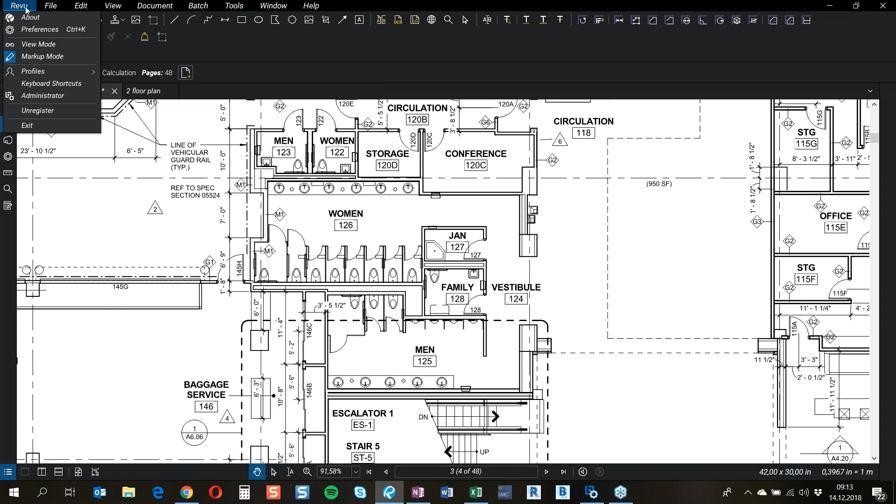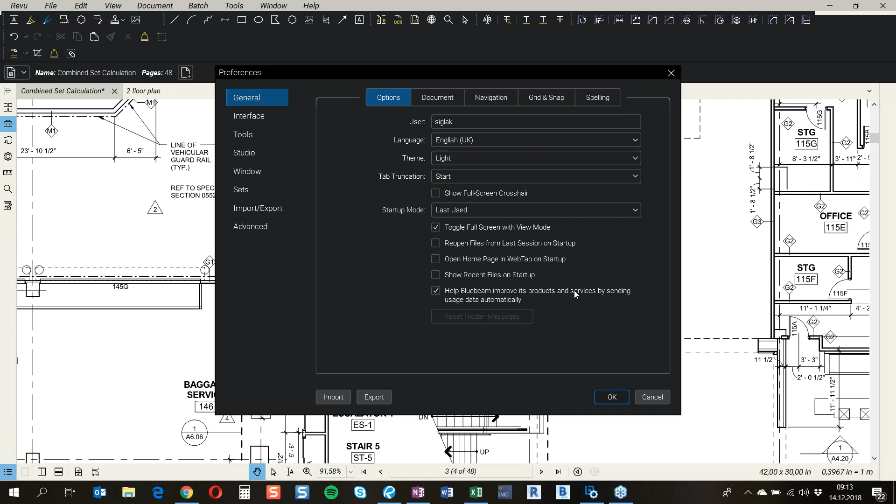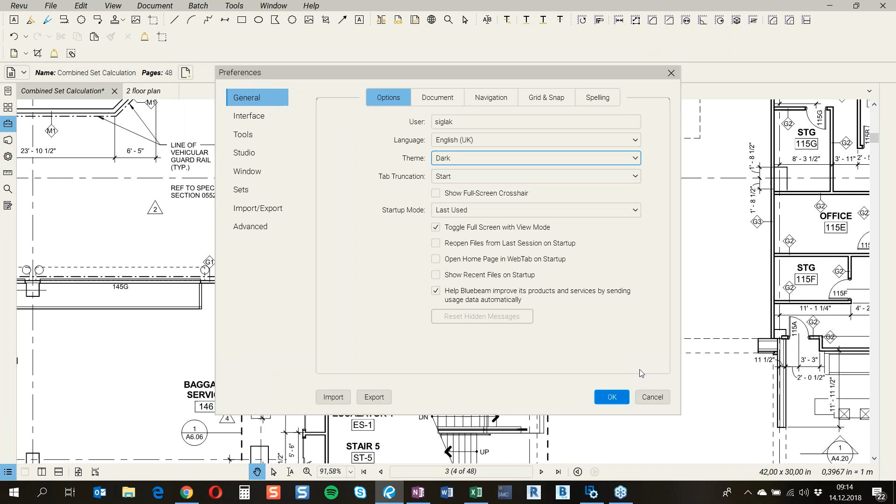So the first thing I'm going to show you is if you go into Revu and Preferences, you have a lot of options here. You can adjust this program as you want to. As you can see, the theme is dark. So if some of you are used to Adobe, which is more of a light program, you can actually change your interface to be white. If you're more used to Adobe and you switch to Bluebeam and think, oh, this is too different, I don't want to use this program, maybe try changing it into a light interface and see if you think it's better. If you go into your preferences, you can find a lot of things you can do here. I'm just going to change it back to dark because I'm used to Bluebeam's dark interface. So it's nice to know.

Second one is you can actually export your PDF from Bluebeam to another program. So if you go to File, you can export your PDF to several different file formats. If you have a PDF with a lot of text and you want to edit it further in Word, for example, you can export it directly into Word. You don't have to copy the text and then paste it into Word. You can take either the entire document or just a page region, so you can take a snapshot of the specific page you want to have in Word.

I'm sorry, I'm just going to sip a little tea while I'm talking. You can also email your PDF, so you can either just send a normal email, or, as I'm going to show you later on, you can use templates. Bluebeam has a lot of templates that you can adjust, so you don't have to do the same operation again and again—you can just take it from a template. So it's nice to know that you can export your document into Word if you want to edit it more.

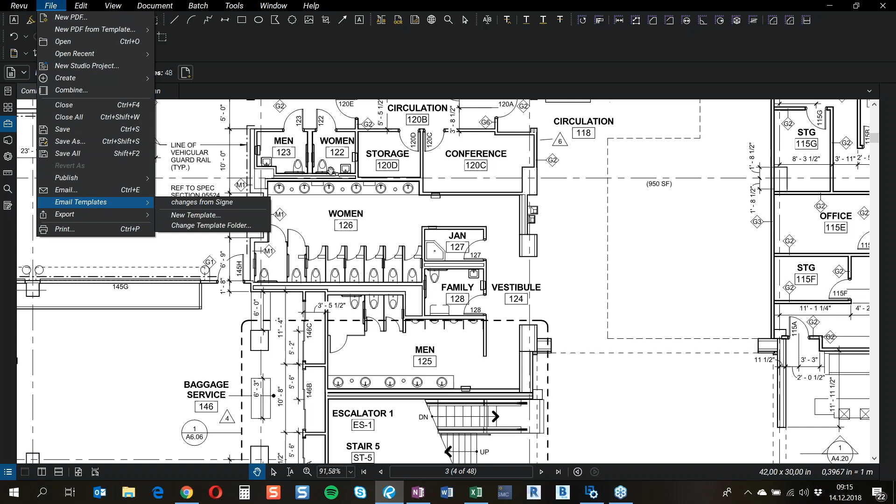Now I'm going to show you how you can easily create a new PDF. Let's say I have this drawing and I want to suggest to the architect that we have one more sink here. I know there's not room for one, but let's just pretend it is.

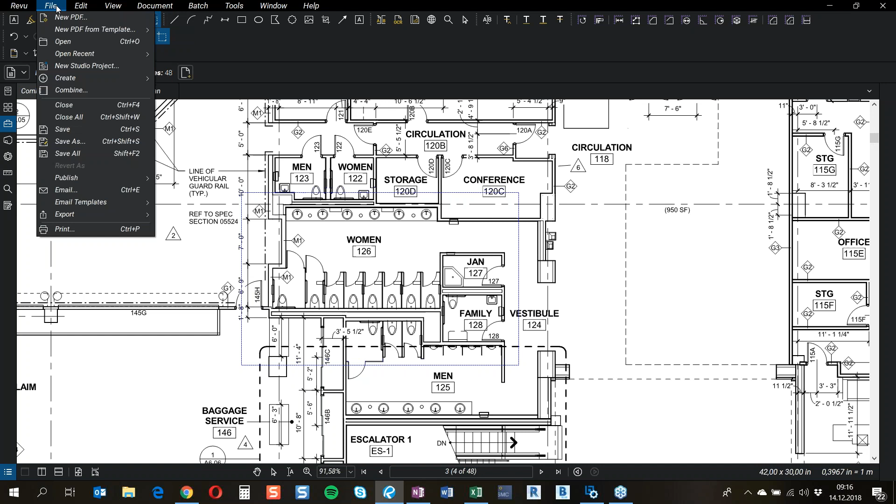So what I'm going to do is just take a snapshot of this area like this. And then I'm going to go into new PDF from template, and then I have my request for information form.

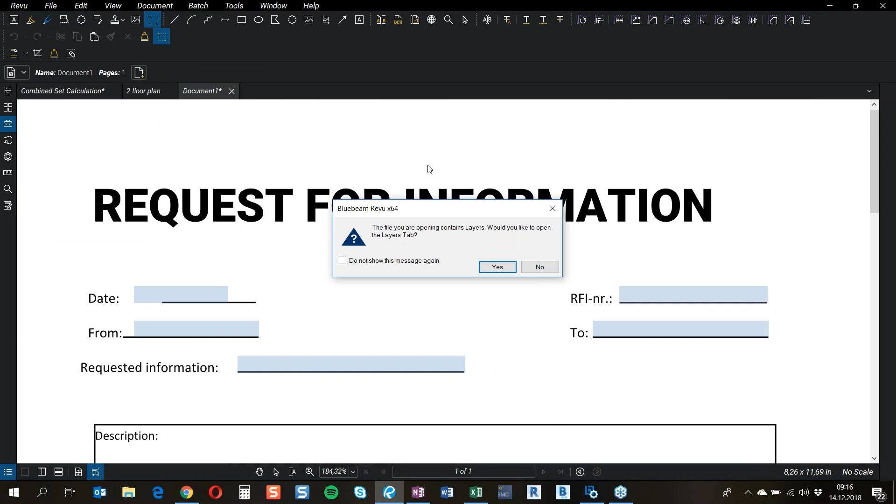This is a template that I have made where I can paste my drawing. So I'm just going to paste it here, and do it a little smaller like this.

Here I've added some text fields, so I can add the date today, and I can add the RFI number. This is number 1, and this is from Signe, and I'm going to send it to Tomas. And can we add another sink?

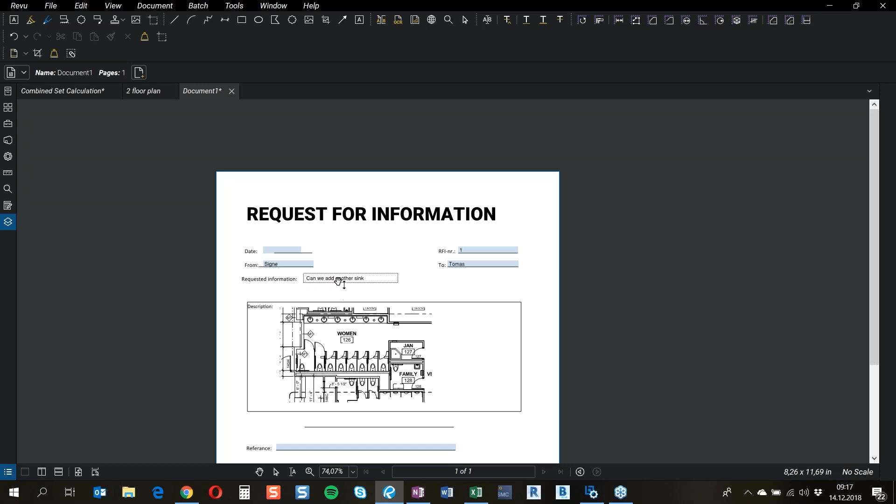So it's really easy to add text into these fields. Now I can take one of these sinks and just take a snapshot and paste it in here. I can also turn it around, so maybe turn it 90 degrees like this.

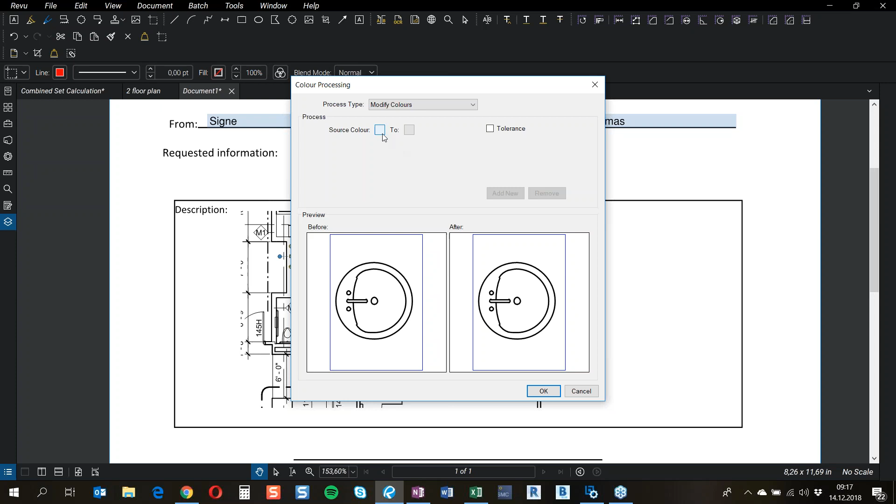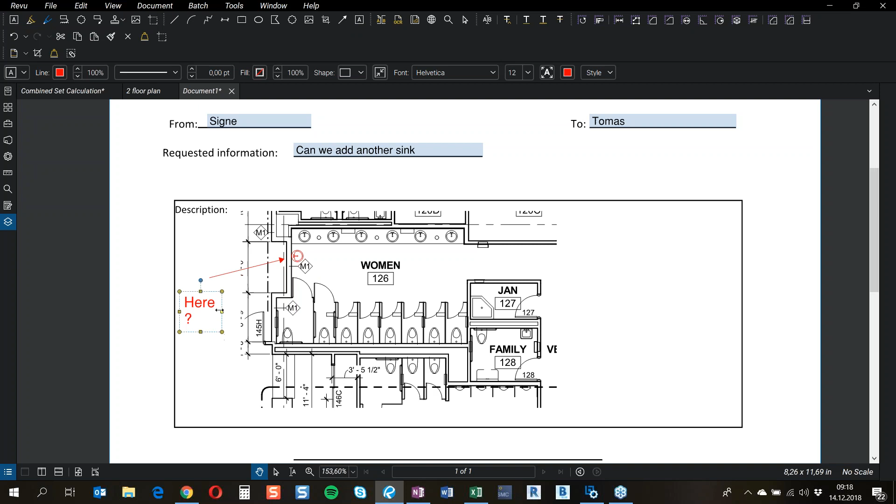I can also change the colors. So you see, I can change the color to red so that I don't change the design of the drawing, but really specify that this is a change that I have made. And I can maybe add an arrow just to notify some more, and maybe a text box saying 'Here?' like this. So you can see it's really easy to create a new PDF, explaining the information that you want and so on.

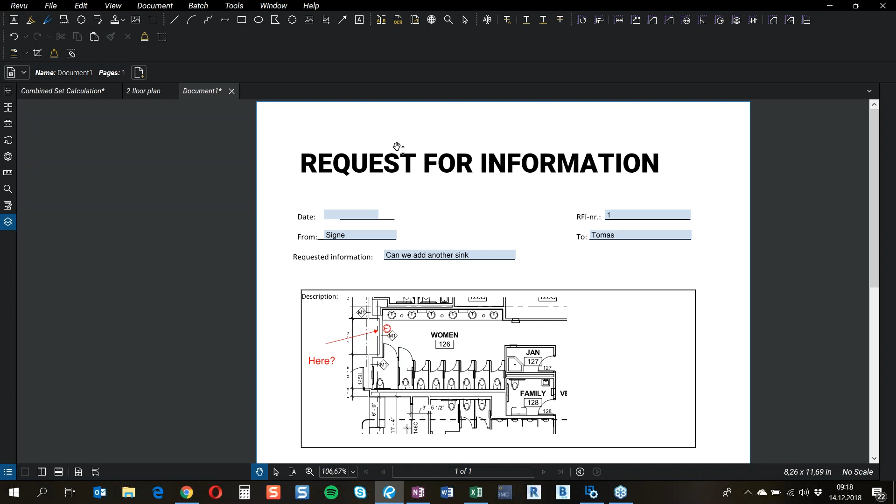And you can also have a digital signature. You can easily add and reply and so on. And as I said, if I want to send this as an email, I don't have to save the PDF on my desktop, open my email, create an email, and then add it as an attachment.

I can just go to File, then Email, and go to the email template, and then Changes, and then my email will open up. As you can see, in my template I've added this text, so I don't have to write it every time. Then usually I send it to Tomas, and then it's just to press send. So it's easy to create a new PDF and then send it by email or exporting it.

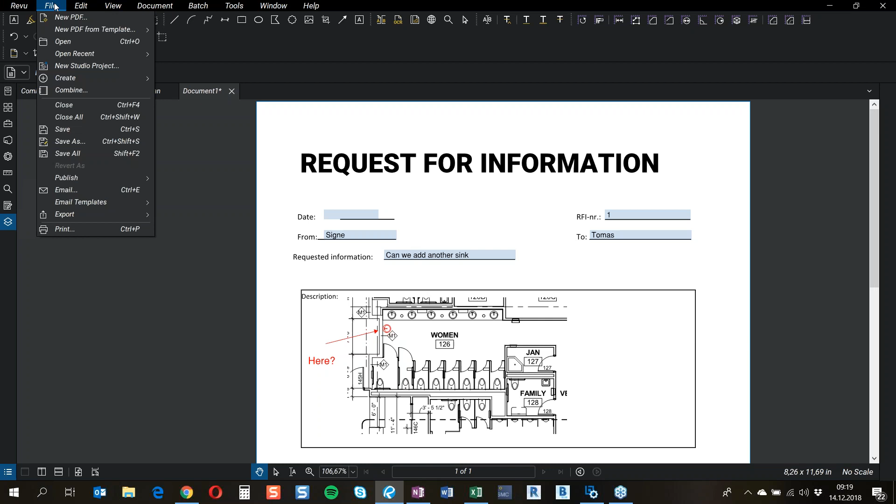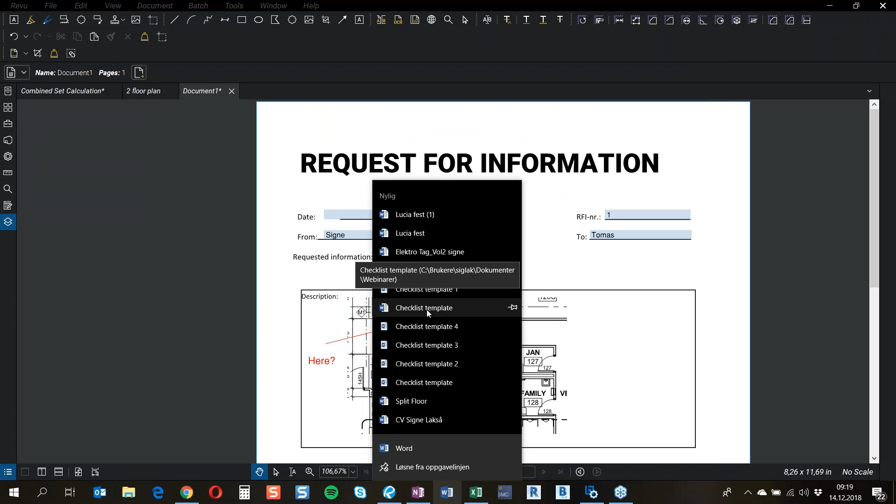You can also create a PDF from an already existing Word document. So I'm just going to go here and see if it's this one. I think so. I can either open it from Bluebeam, or I can go into Word and then go to Bluebeam and create PDF.

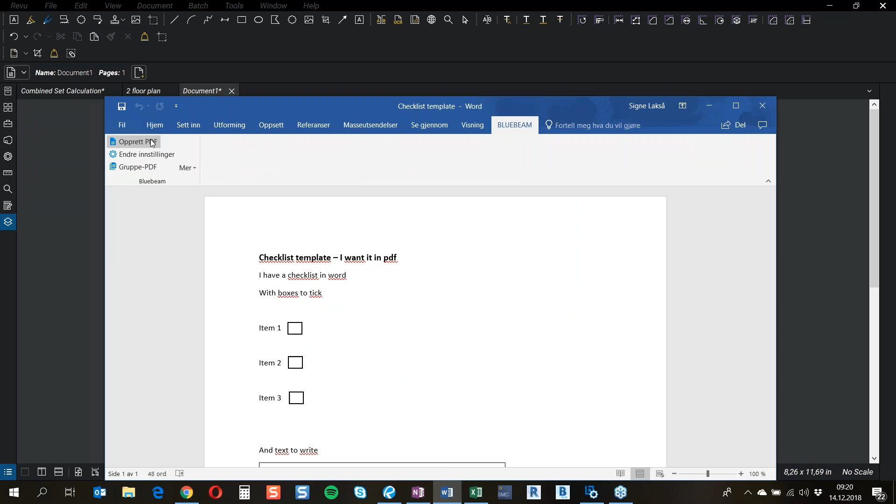Bluebeam has add-ins to all your programs, so all your Office programs and also your design tools like Revit and AutoCAD. So here I've just imported, or made a PDF out of my Word document, but these boxes, I want them to be able to tick on. I want to be able to write here, and I can create form fields out of this, but I can also make Bluebeam do it for me.

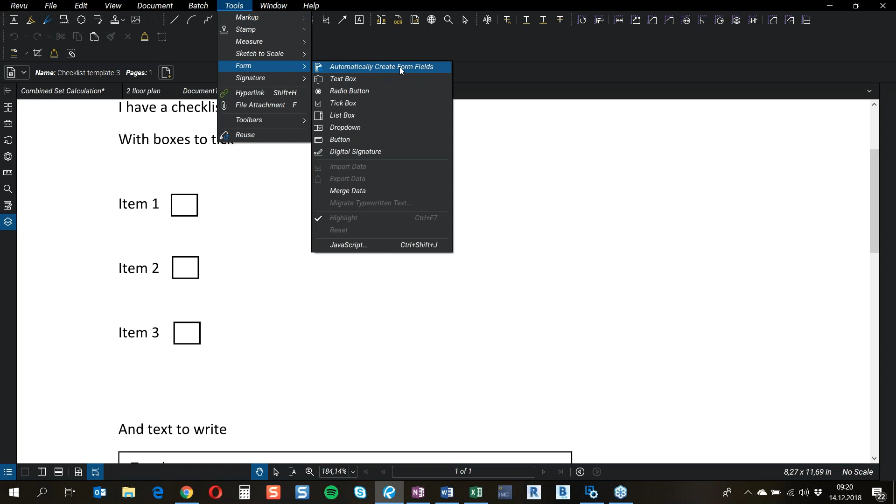So if I go to Tools, then Form, and choose 'automatically create form fields', then Bluebeam sees what these form fields are. So here, if you have square boxes, it makes me able to tick them. And if I have a text box, then you can write easily in that one.

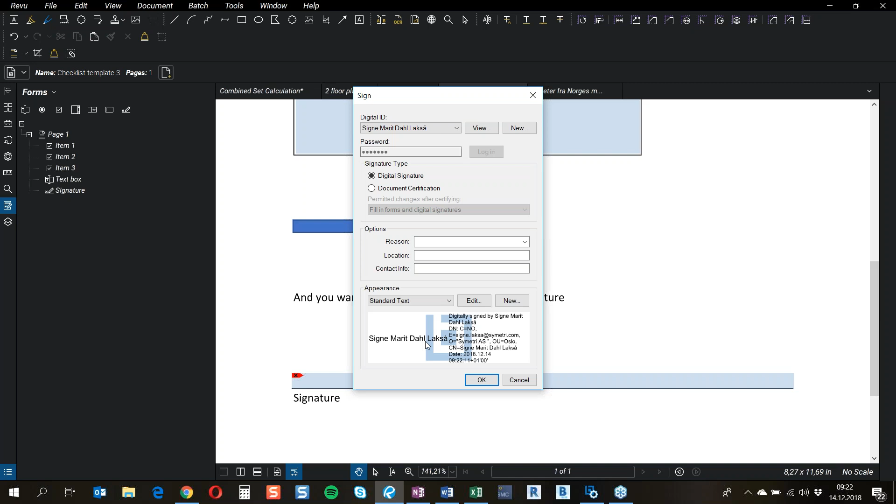And if you want to sign it, if you have a line that says signature, then Bluebeam actually creates a signature field here. So I'm just going to log in to my digital signature. This is a standard ISO standard signature that's approved. So I press OK, and then I have to save it as signed.

And there you go, I've signed my document.

So it's really easy. If you have your checklists in Word and you want them in PDF, you can just create a PDF and then create form fields automatically.

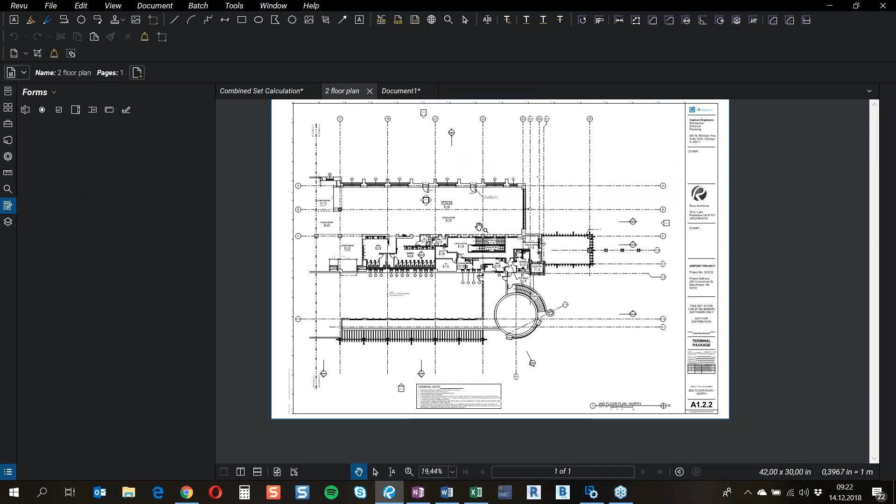Next, I'm going to show you that you can actually search your documents both for text and for pictures. It's a really cool feature in Bluebeam that you can search, for example, let's say the number of sinks in this drawing. I'm going to search, and here you can see that I can search for text or I can search for visual, and if you search for visual, then you can get a rectangle.

So I'm just going to get a rectangle, and I'm going to pick this sink here. You see this is the rectangle, and I can define the sensitivity, and also, well, you have different options here. I'm just going to press search.

And there you go. Here you see all the sinks that I have in this drawing. What I can do with these is select all, and I can, for example, apply count measurements to be checked, and apply this one that says I have checked these things.

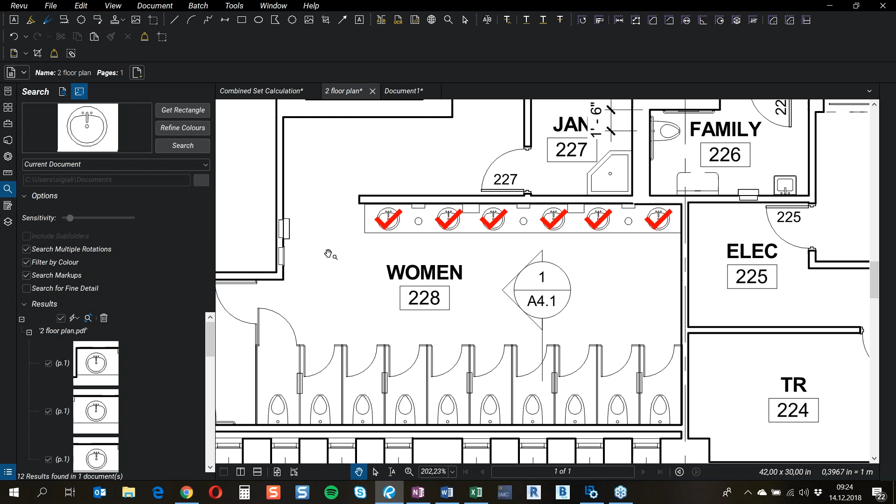And there you go. So if you want to count the number of sinks in one drawing, you don't actually have to count them one by one. You can just search by picture, and then Bluebeam finds all the sinks for us and counts them for us. So that's a real cool feature, I think.

And also the same for text, and you can mark the text with a highlighter or something. So it's searching through your document in a really good way.

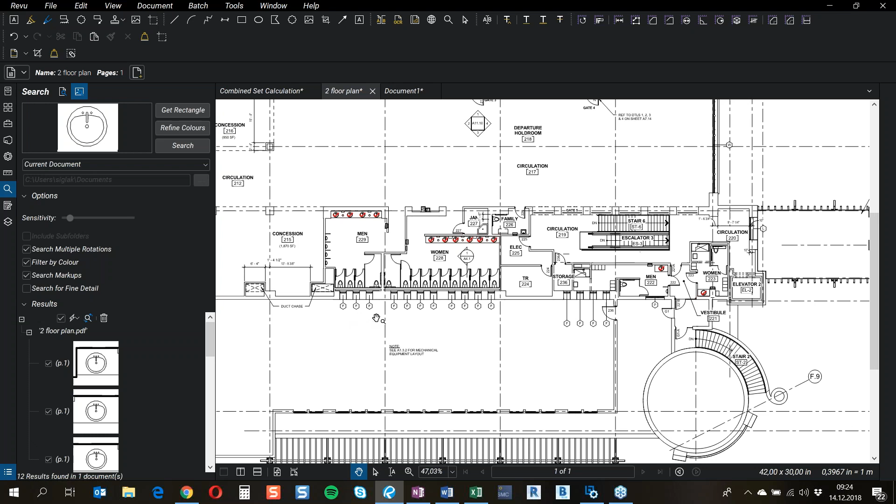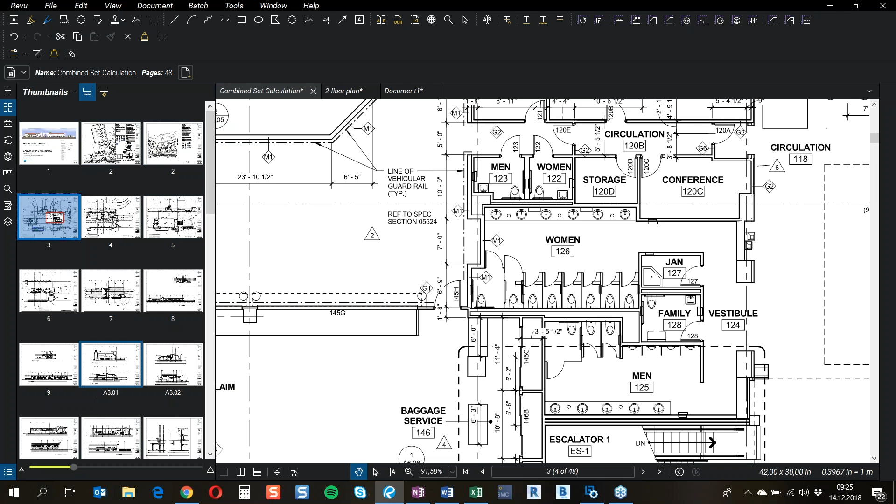Now I'm going to show you how you can work with large PDF documents. So if you go here, I have a combined set of several pages. I have a lot of pages in this document, and I find it hard to navigate through them. I have to scroll up and down all the time, and it's kind of difficult to find the drawings that I want to.

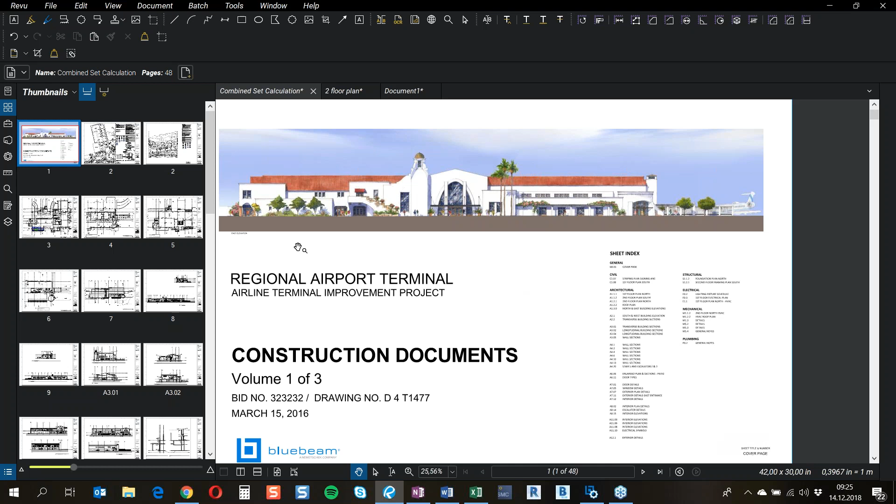So I want to link all this together. Usually when you have a batch of PDFs, you have a front page with all the drawing numbers, for example, and it would be cool to navigate through these. So first I'm going to rename them, because as you can see now they have inconsistent names as labels, and here you have the drawing number and so on. So I'm just going to create page labels based on the drawing number.

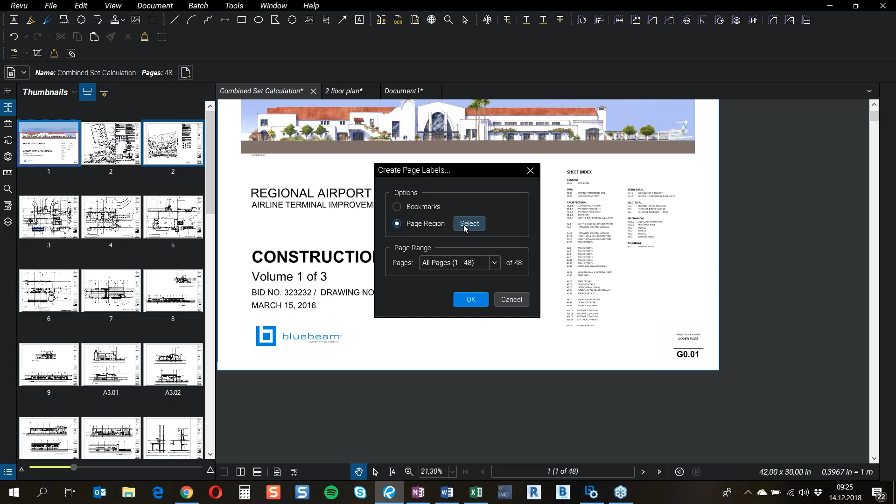So I'm going to pick a page region, and I get a square that I can select. I'm just going to select this one. And there you see the region, and then you have a preview, so you can see that you have selected the right text. I press OK, and then I'm going to get all the pages.

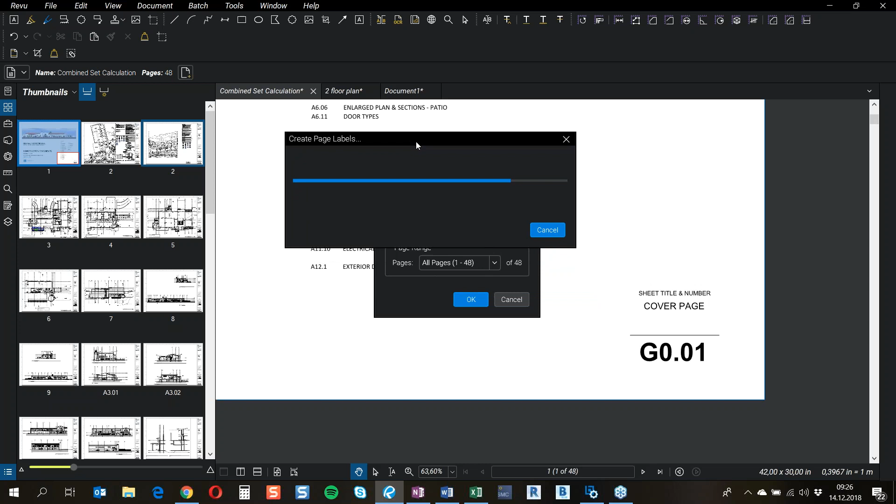Okay, so I think it froze a bit. Usually it doesn't take much longer time than this. Let me just cancel this one, and then...

All right, so most of them got a link. I'm just going to say it's okay for now. It's always a demonstration ghost coming to bug me.

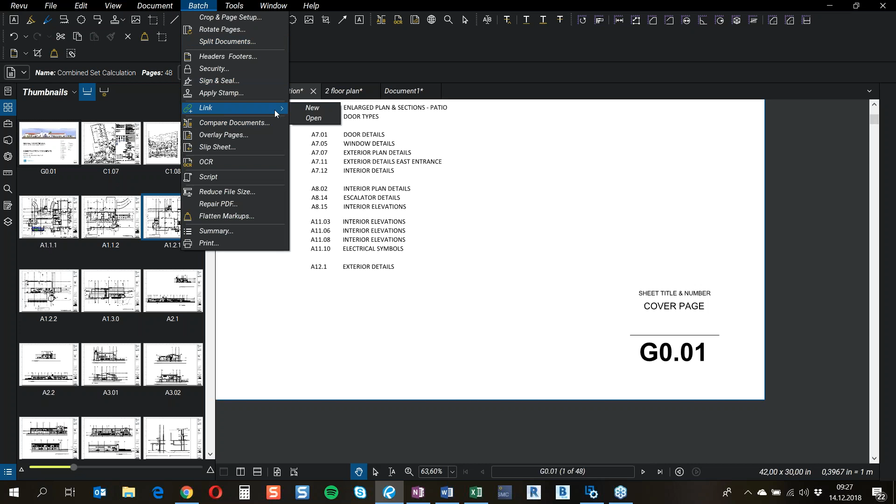Then I'm just going to go to the batch and then the link, and I'm going to create a new hyperlink batch. So there you go, and I'm just going to take these ones away. So we just have this one. And then I'm going to create it based on the page label, because that's the one that I created now.

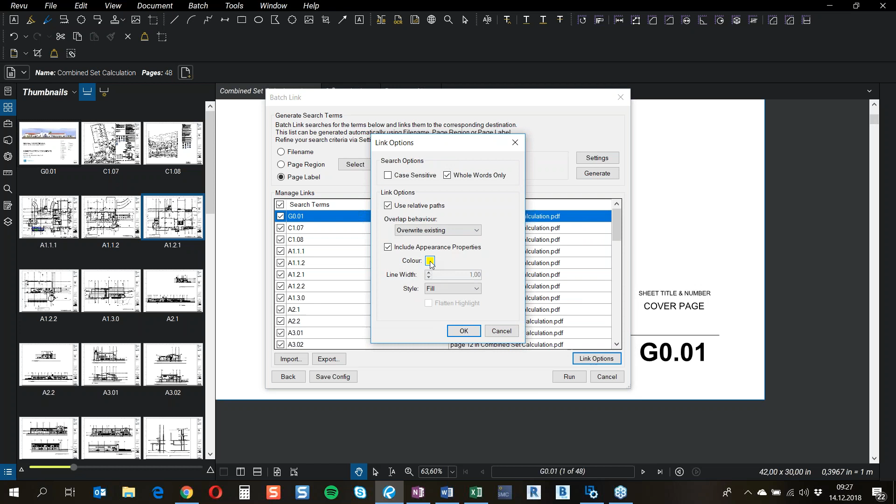And then generate, and you can see that there's a lot of links. I have a link option here, so I like to have it in this yellow color. I know that in that standard Swedish drawing, I think it was purple, or it was another color, but anyway, you can change your color here if you want to. And I'm just going to press run.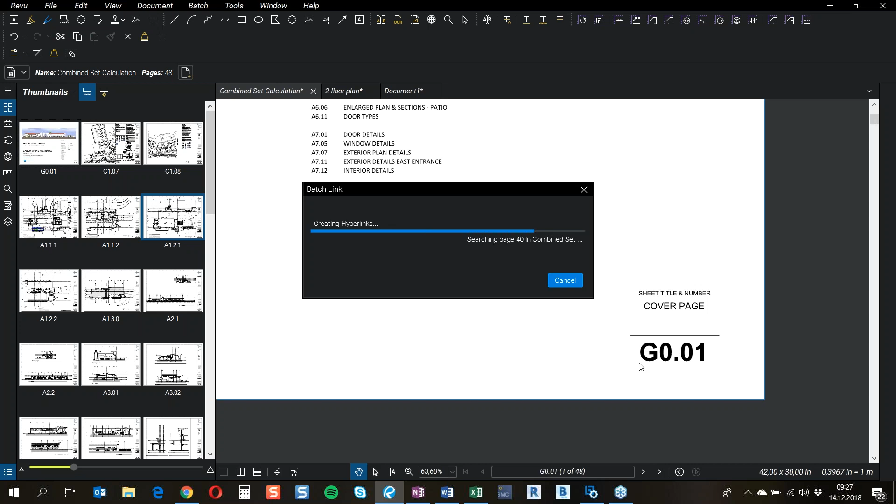Bluebeam searches through the whole document, and everywhere it finds the drawing number, it creates a hyperlink. It didn't take many seconds to create 295 hyperlinks.

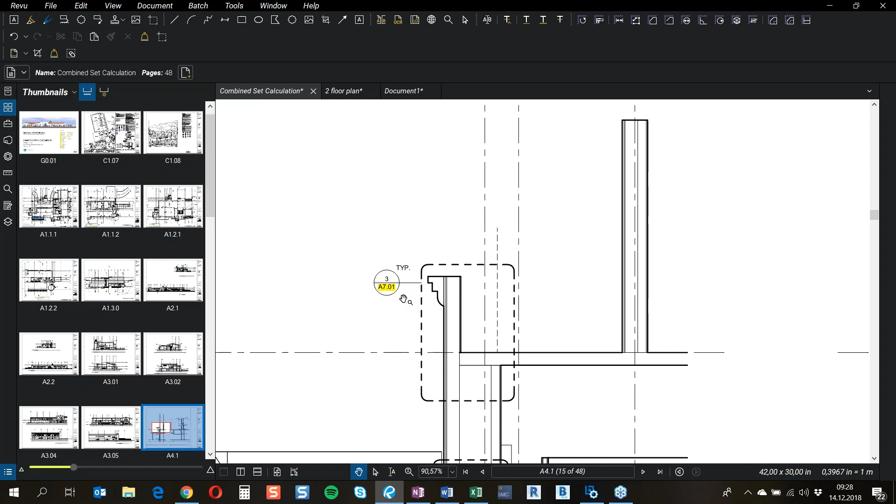As you can see here, these fields are now yellow, and I can click on one and it jumps to that drawing. If I zoom in and want this detail, I just click on that one and it jumps to the detailed drawing. So it's really easy to navigate through the document, and it makes the PDF very easy to use on a tablet out in the field.

These hyperlinks are ISO standard, so when I save this PDF document, they are saved with it. Anyone who has a PDF program can open it and the hyperlinks will still be there. You don't have to have Bluebeam Revu. So it's really cool to create a lot of links.

Now I'm going to go over to markups, because Bluebeam is a brilliant program to do markups in. You can adjust your markups and create your own, including your own company markups. It's a really good program to work with markups.

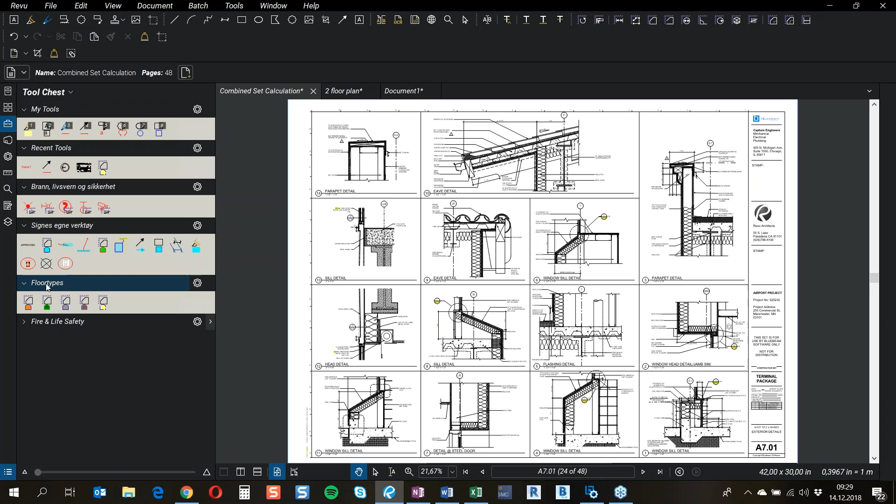I'm going to go into my tool chest. I've made markups for floor types, because what I want to do now is measure, or take out some quantities on the floor types in this project. I'm just going to go into this page, and as you can see, I have already measured up some rooms - I have carpet in my office and some raw concrete here.

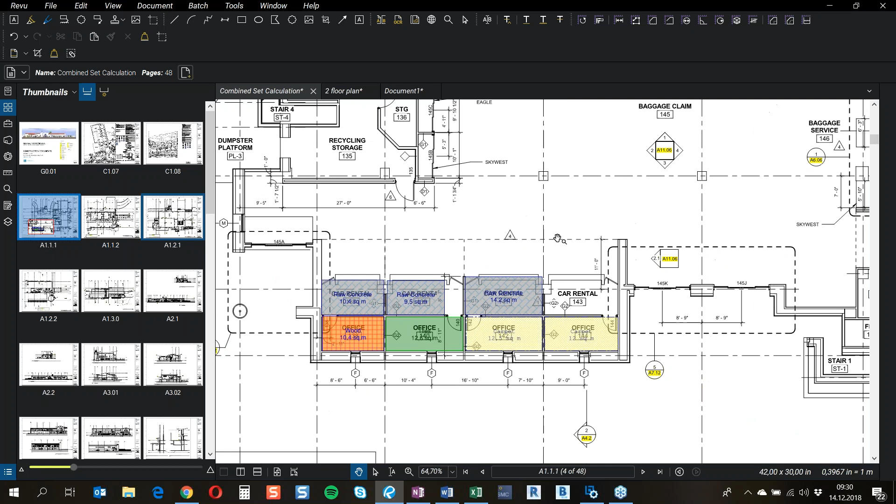Now I want to create the markup with carpet tiles. So I'm just going to go to my area measurement and take this one. I can change the line to yellow, maybe, and change the fill to some green, a little bit see-through, and so on. So you can change your markup a lot.

You also have additional settings in your cogwheel here, where I can make it carpet tiles. So when I'm finished with my markup and like the way it looks, I can save it into my tool chest, adding it to my tool chest called floor types.

So there you see, I have area measurement. Now I can create more area measurements with the same settings, called carpet tiles. But why do I do this? Why do I name it carpet tiles? This is because I now want to connect my measurements to my Excel sheet.

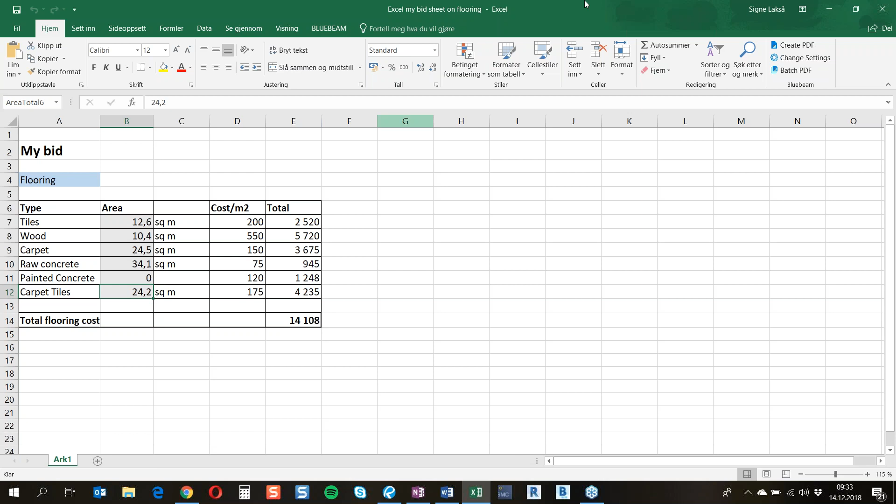As you can see, the measured square meters that I have done in Bluebeam pops up. I'm going to try and show you, if I put this screen here - wait, sorry, it's not easy navigating like this. All right, so if you pay attention to the carpet tiles, it's 24 square meters.

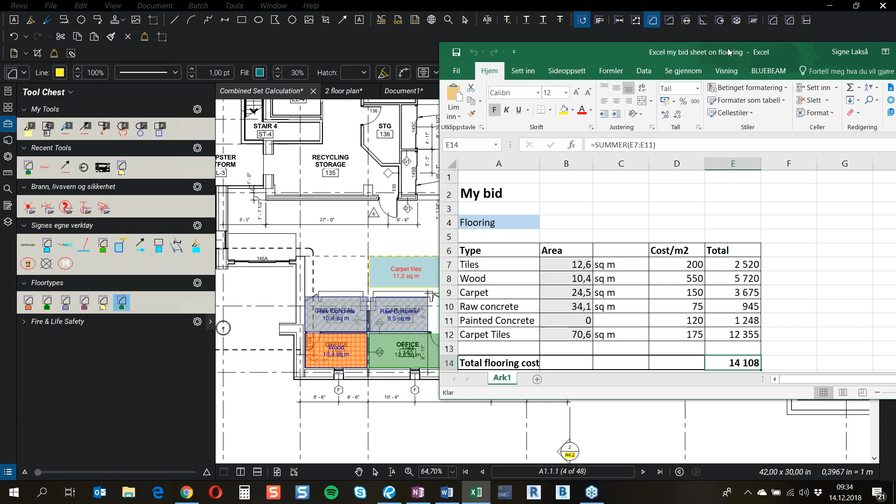If I do another measurement right here, and then open my Excel sheet, you can see it added it on. So it's really easy to make your markups, do your measurements, and then connect it directly to your spreadsheet, and get the total flooring cost out at once. I think it's a really cool way to calculate your project if you're going to calculate it using PDFs anyway.

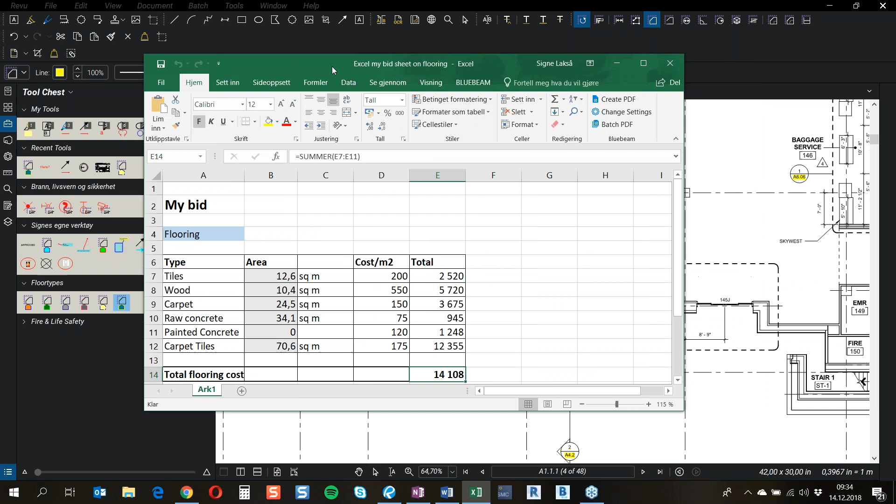So I'm just going to add a couple more markups, just for fun. After you make all your markups, you can see them in your markups list, where you can have a full overview of all your markups.

You can add information to your markups as well. Let's say, for example, that I want to add a responsibility to this markup. Then I go to my responsibility column and add Tomas as a responsibility, and so on. You can edit several of the markups at once.

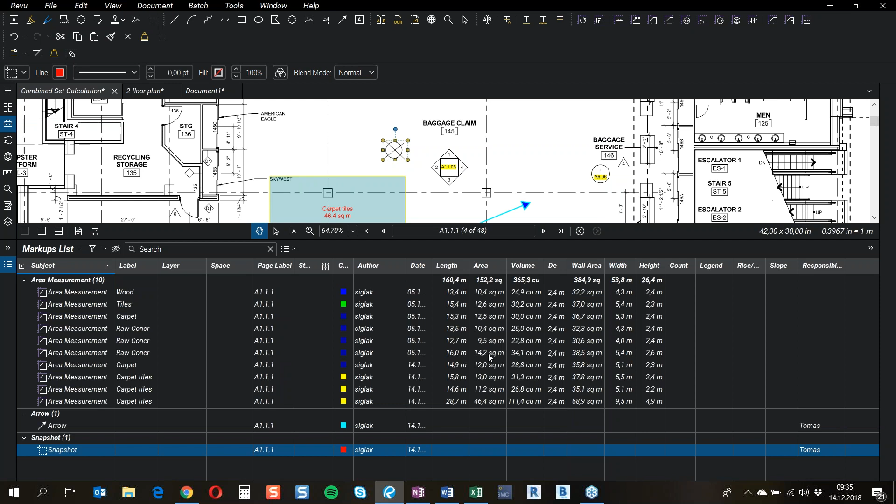You can add or remove columns. If you go to the columns, you can remove or add several of the columns that you need, and you can also create your own columns. So it's really easy to make this as you want to.

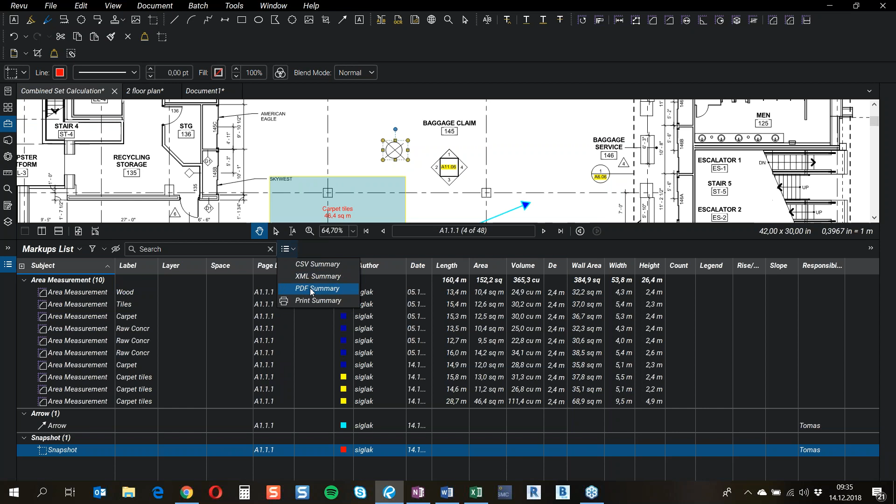And of course, after you're done with your markups and your markups list, you can export as a PDF summary. If we look into the PDF summary, I can add several documents and so on. But what I really want to pay attention to is the append and hyperlink to current PDF.

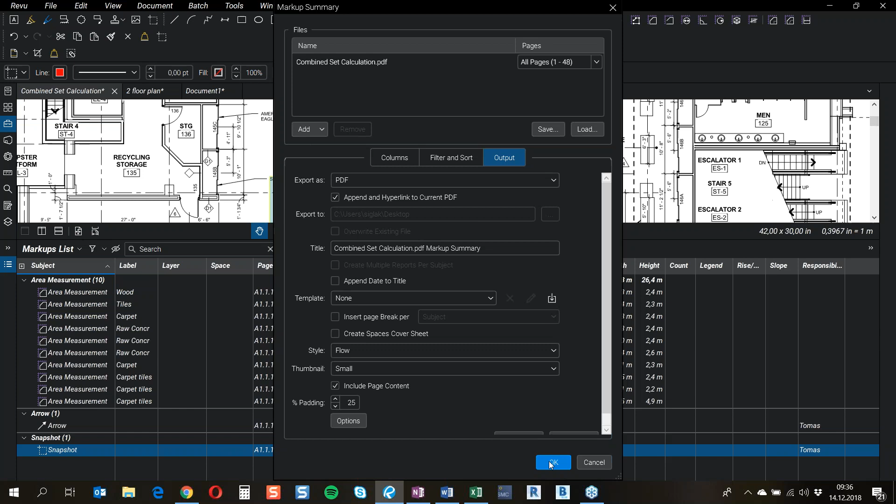This allows you to create a report that is linked to the PDF document. So if I create a report, as you can see here, this report includes all the columns. If I remove some columns, then there will be less information here.

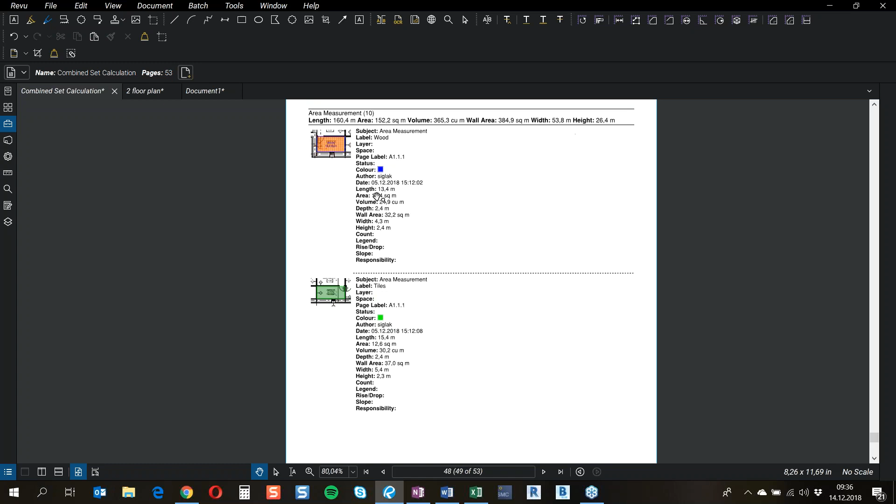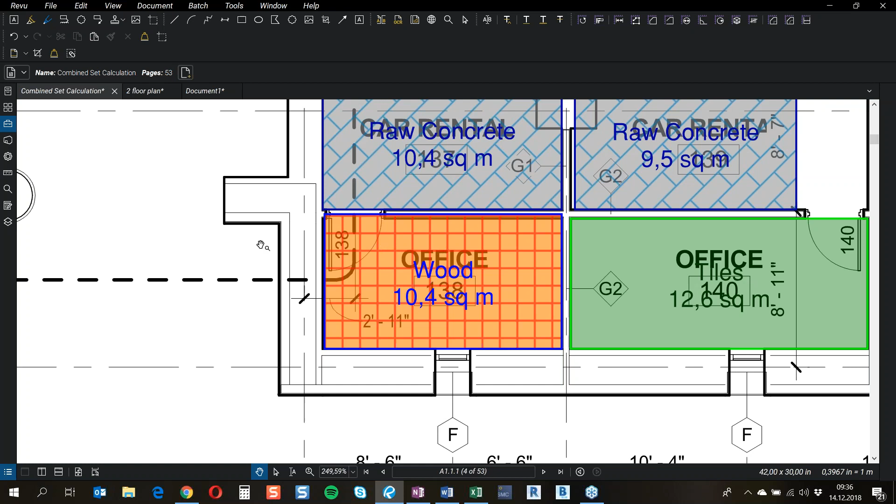But you can see that I have a small picture of the markup that I have created. And if I click on this one, it will jump right to the drawing where I created the markup. So it's really easy to go through the report and see what you mean with this markup, where it is. Just click on the issue and you will jump right into the document, and it makes more sense. This is also a hyperlink, so it works both in Bluebeam and other PDF programs. It's a really good way to create a report.

The last item on my top 10 list is how to get help in the easiest way. Bluebeam has really good support pages. They have both videos and descriptions of the problems that you need help with.

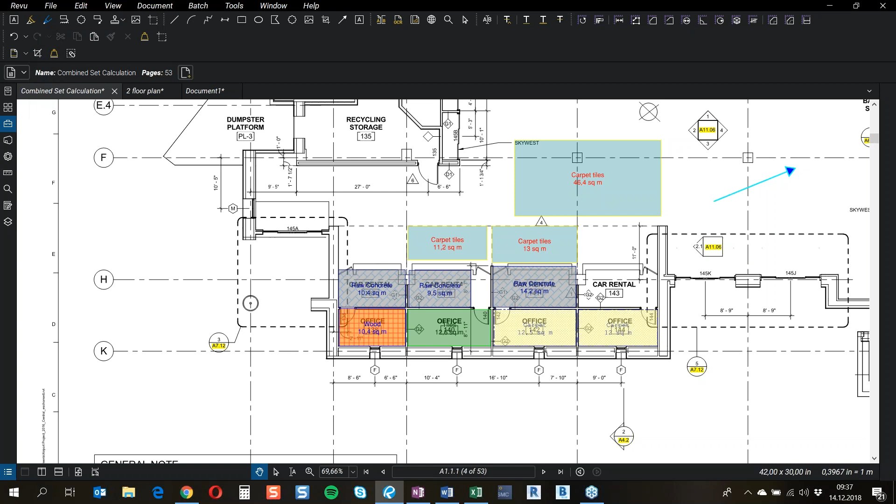So if you're in Bluebeam and working with something, for example a quantity link, and you want to know how it works and need some help, I can just press F1. There you go, F1. And it opened up the web tab of support.bluebeam.com.

Here you have an overview of all the things that you might need help with. So for example, if I want to know more about working with markups, I can see here how to group them and so on. It's really easy to just click your way through here.

You don't have to go and open up Chrome or any other internet browser. You just open it directly up in Bluebeam Revu.

So that was my top 10 features of Bluebeam. Hopefully I've shown you some things that you didn't know you can do in this program, and don't be afraid to just click around and see what this button does, because you can do a lot of things in this program. As I said, these were my top 10 tips for the day.

So are you going to take the screen back, Tomas? Yes, I am. Hang on one second, I'm going to start up my PowerPoint again.

Now you've seen some of the information from Bluebeam about the tips and tricks. We're going to share some documentation from this to show you. But there are also some links that could be of interest to you. I'm going to show them to you in just a second.